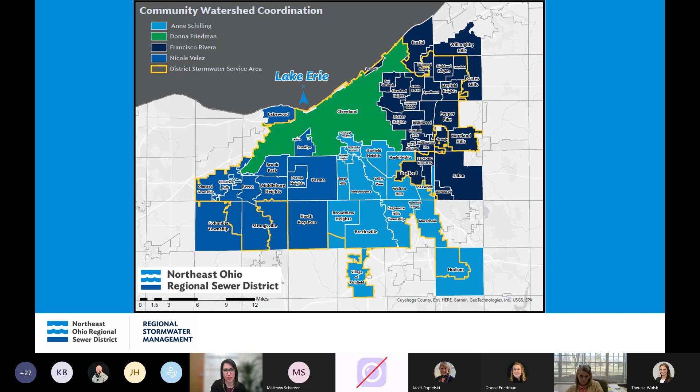So we're here to serve you. Our contact information is going to be at the end, but please feel free to reach out to us at any time for any questions you have. And with that, you're also welcome to pass our information on to your residents.

Okay, so here we've got the community cost share. Most of you know that 25% of the total annual stormwater management program fees collected from each member community are then allocated back to your community for local stormwater issues and projects. Currently there's over $21 million available to our member communities, so please think about projects you'd like to submit.

A couple things to remember: you need to have an approved application and an executed agreement with the sewer district before your project begins. So be sure to contact myself, or if you represent two communities, the appropriate watershed team leader for that community, and we will gladly walk you through this.

Also, consider an allocation agreement for larger projects. This will allow reimbursement back to your community over a 5-year time span, so your community doesn't have to have all that money up front. That can be quite helpful.

We want to encourage you to please use your community cost share funds, and then remember to submit for reimbursement. We want to get that money out of our bank and into yours, so please request your reimbursement so we can get that money back to you.

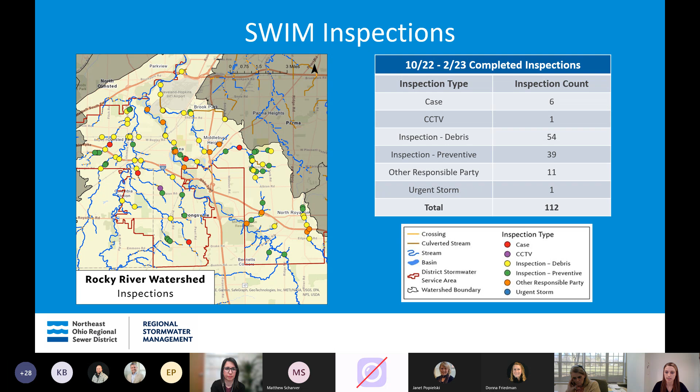Since our last WAC meeting, SWIM has completed 112 inspections in the Rocky River watershed. We've had 6 customer calls ranging from debris to flooding or erosion reports, and 1 CCTV video, which is when we have a contractor do a video inspection with equipment because usually the pipe is too small for us to fit in. We had 54 debris inspections, which include other responsible party inspections such as railroad, ODOT, or county crossings, and our quarterly debris rack inspections. We also had 39 preventative inspections, which are routine follow-ups based on structural condition scores, and 11 other responsible party inspections, which are when we receive an updated inspection report from that responsible party, allowing us to update the structural condition score for our record keeping.

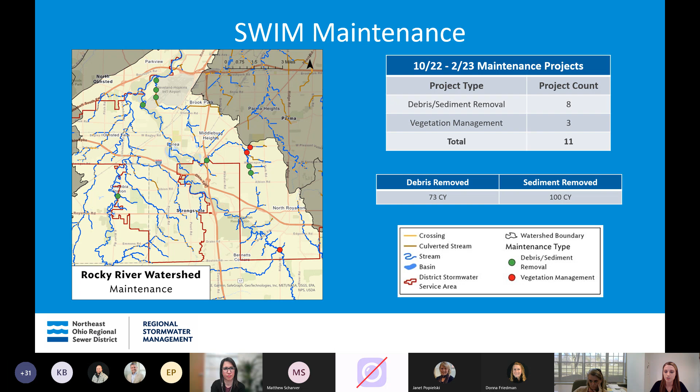For maintenance, we completed 11 projects that included 8 debris and sediment removals. For debris, we totaled 73 cubic yards, and for sediment, we had 100 cubic yards, all of which was from downstream of the airport in the Stilling Basin. We also had 3 vegetation management projects, which are our long-term routine maintenance for project sites, including tending tree cages, pruning, weed pulling, and mulching.

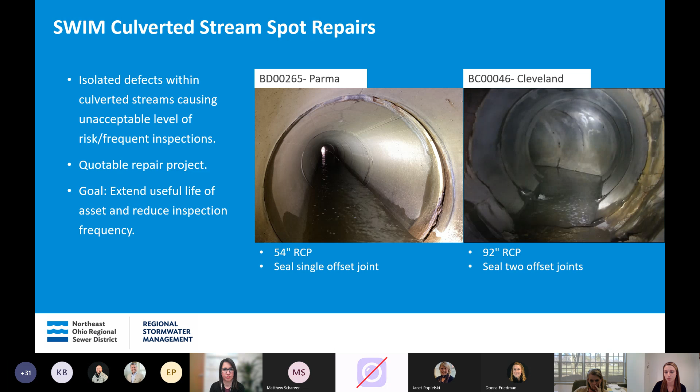For this year, SWIM is kicking off a new contract that is quotable for minor culvert repairs, such as patching or fixing joint issues. Typically, our design and construction team handles the larger projects for a full rehab or replacement, but this is intended to extend the useful life of the asset to reduce our inspection frequency. For example, we have BD 265 in Parma, which is in generally good condition other than one single offset joint with visible backfill. Repairing it will improve our rating, which will reduce our inspection frequency.

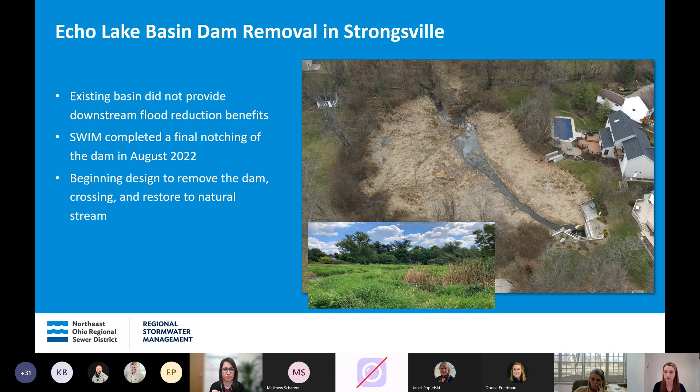Another project moving forward this year is our Echo Lake Basin dam removal in Strongsville. To recap from our last WAC meeting, the stormwater master planners found no flood reduction benefit in having this basin in place, so we wanted to redesign this as a natural stream. Last time, we talked about the gradual notching of the dam to lower the water level, which was completed in August of 2022. Beginning in the second quarter of this year, design will move forward, which usually takes about 1 year, and after design is complete, we can move into construction. That's what SWIM has since the last meeting and moving forward.

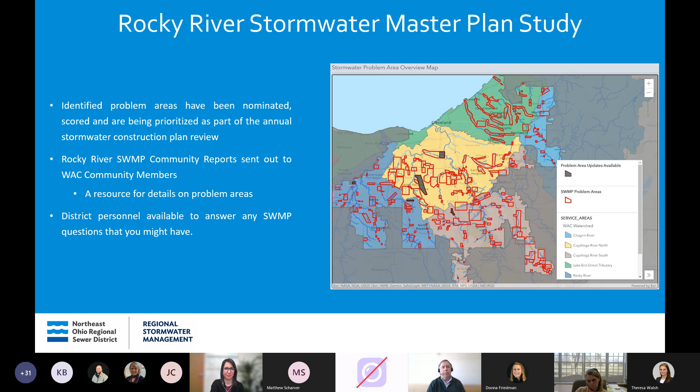So as I mentioned, we've just gone through the nomination process for 2022. What we did is we took all the previous nominations that were put into place from our various stormwater master plans and any additional projects identified through our swim group or from various communities. Back in August of 2022, we wrapped up all those project nominations. Since then, we've gone through validation in August and through October of last year, and finalized the scoring in the fourth quarter.

Right now, we're getting ready to finalize that stormwater construction plan and then proceed towards the end of this month to have that approved by our district board, and then we'll be implementing it for the remainder of this year.

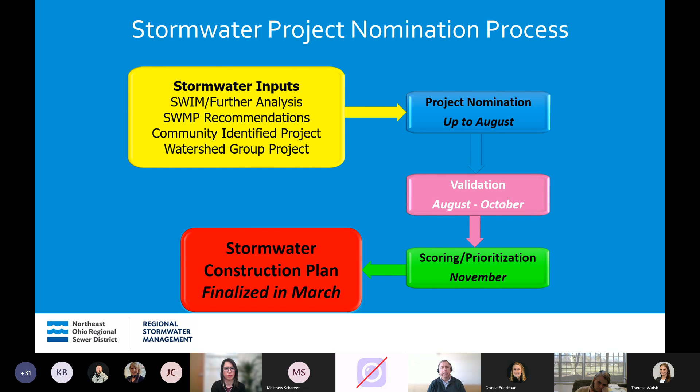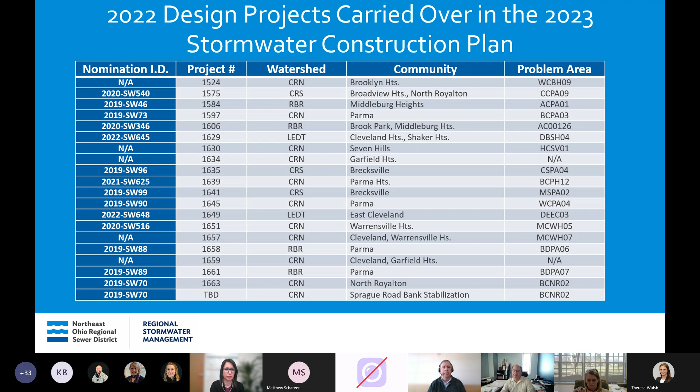In addition to those, we identified 4 projects that were previously nominated that are moving up into the 2023 stormwater construction plan, based upon a couple of different reasons. The first project is the West Branch problem area involving Kolleda Ditch. This is an area with a lot of failing infrastructure associated with this particular problem area, and as a result, we want to move that forward so we can address that. Phase A will specifically address the Kolleda Ditch within this problem area.

West Branch Problem Area 5 is located in the Rocky River subwatershed. With this project area, we've actually secured a critical amount of the property required to allow us to implement the first phase of that project, so we're going to be moving forward with that one.

The third project is the Applewood Basin Improvement Projects. This is in the Baldwin Creek subwatershed within the Rocky River. Again, we're dealing with failing infrastructure involving those basins, so what we want to do is get that into a design program so we can address those deficiencies in the basins to maintain the level of conveyance through this area of Baldwin Creek.

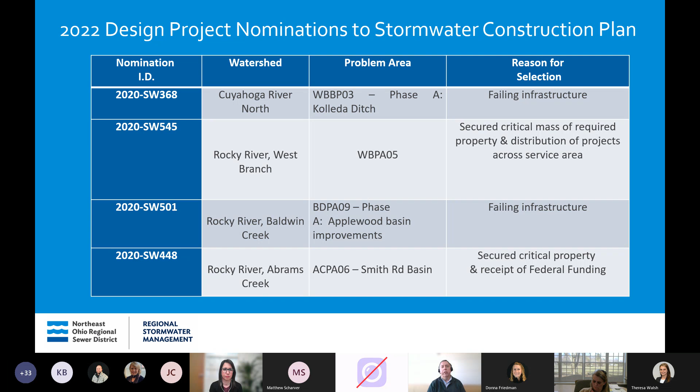And then finally, we have the Smith Road Basin Project, which is in the Abrams Creek subwatershed in the Rocky River. With this project, we were able to secure all the property involved with this problem area, and we were also able to acquire federal funding to allow us to move this project forward into design and construction. In addition to these projects, as we gain capacity, we'll be adding additional projects onto this listing as well.

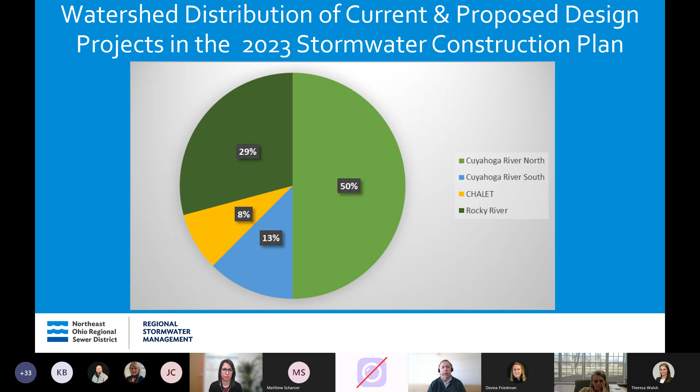So again, on this slide, what you're seeing is all the current and proposed design projects listed in our 2023 stormwater construction plan. This graph matches pretty closely with what you saw in the similar pie chart for the 2022 stormwater nominations.

As I mentioned, we have about 12 projects identified during our nomination process that need to go through advanced planning. These are projects that we want to get ready for full design, but ones where we may need additional information to understand the full impacts the project will have on the RSS. Some of these projects are very large, typically above $10 million in estimated planning costs to do the design and construction, and that cost doesn't work very well with our annual stormwater budgets.

What we're looking to do is review those projects and see if we can break them down into phases so they can be more manageably put through our annual construction budget to move them forward. Same thing is true if they're very complex projects—we want to break those down so we can move them forward, and collaborate with our partners to make sure we get any additional information associated with those advanced planning tasks.

Two of the projects we recently completed for advanced planning: the one on the left is Baldwin Creek Problem Area 6, located at the intersection of West Pleasant Valley Road and York Road in the city of Parma. This was a very complex, high-cost project that we successfully broke down into several tasks. We'll be starting the first task this year, involving the stormwater basin in the upper right-hand corner of the intersection.

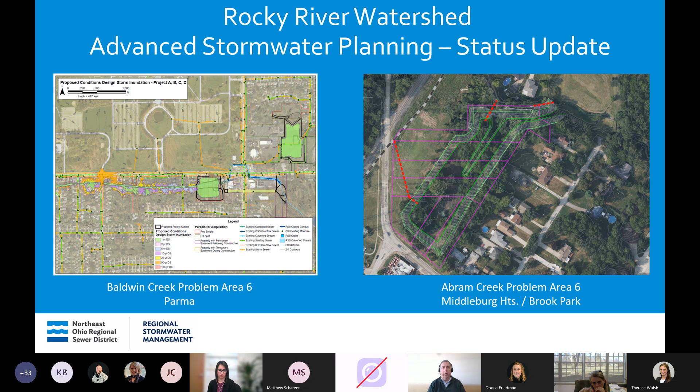Another project we recently completed was Abram Creek Problem Area 6. This involved installing a stormwater basin to address RSS flooding impacting the border between Middleburg Heights and Brook Park, specifically on Smith Road. With this advanced planning task, we confirmed the location of this basin on a piece of property recently made available to us, and did further modeling to ensure the installation would maintain the preferred alternative for this problem area.

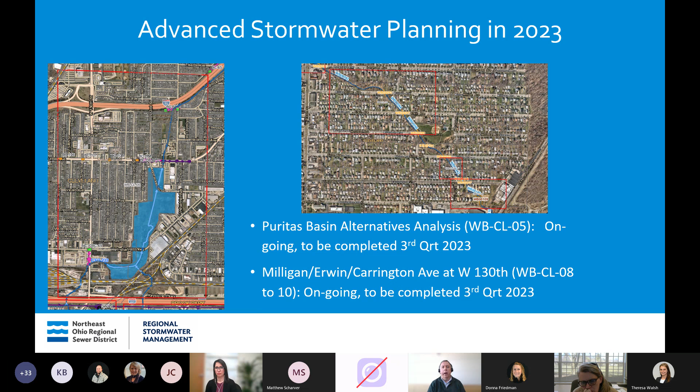Now we're getting ready to start another advanced planning task, again within the Big Creek West Branch sub-watershed. We're looking at this one because the preferred alternatives originally developed as part of the Rocky River Stormwater Master Plan are no longer viable. We want to get a better understanding of the interactions of a preferred alternative, both between the RSS and local stormwater systems, and see what the benefits would be to the new alternatives.

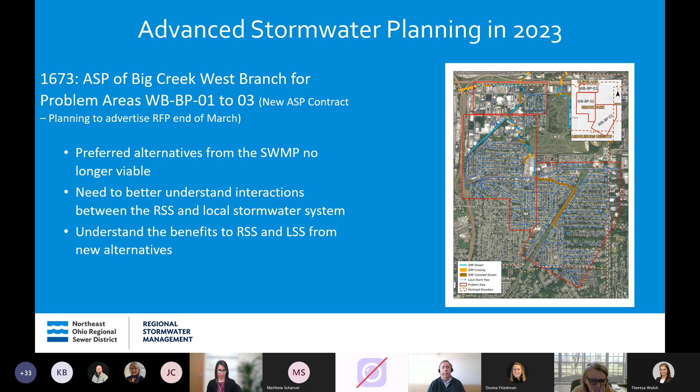In addition to these district-led projects currently underway, we have a number of community-led projects that we're providing financial and/or technical support to. Looking at the table, we have approximately 7 projects currently in the design phase and in various stages of design, getting ready to go to construction.

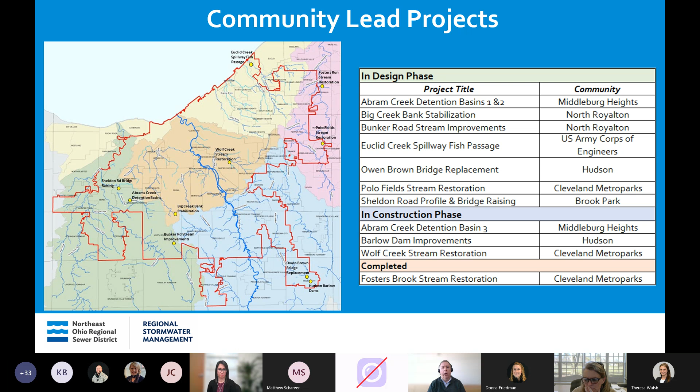We have 3 projects currently in the construction phase in the Abram Creek sub-watershed. And finally, we have 1 project, the Foster's Brook Stream Restoration, that we just completed in the 4th quarter of 2022. Next slide.

To give you an example of 2 of these community-led projects, the one on the left is in the Abrams Creek sub-watershed. This involves the design and construction of 3 detention basins to alleviate flooding along Big Creek Parkway. We're getting ready to start construction on basin number 3, which will be let in the 2nd quarter of this year with construction starting in the 3rd quarter. We're also continuing design of basin number 2, with plans to start construction probably in the 4th quarter of this year.

The image on the right shows the Sheldon Road project. We have a lot of inundation associated with Sheldon Road. This project, teaming up with the city of Brook Park, involves raising the profile of the road and replacing the bridge so we can lift it up high enough to get just about to the 100-year level of service on this roadway. Next slide.

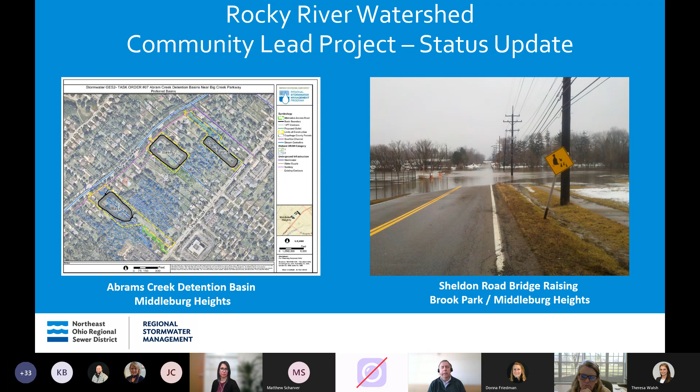We also have a number of projects being led by our watershed partner groups throughout our stormwater service area. Many of these are ones where watershed partners have applied for and received Ohio EPA Section 319 grant monies, and we're providing matching funds and potentially technical support. We have one project finishing its design work in the Rocky River, the Greenbrier Valley floodplain restoration, and four projects currently either starting or in substantial completion in the construction phase.

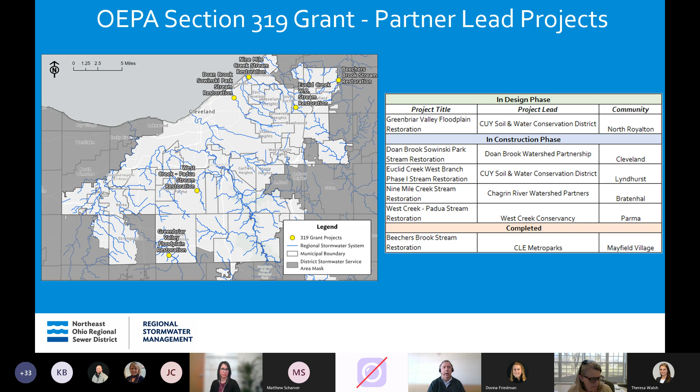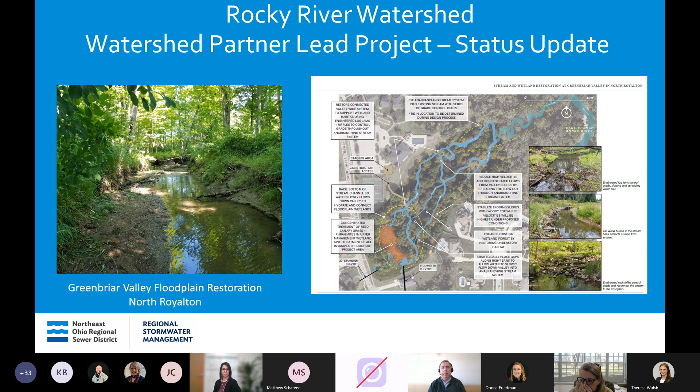To give an update on the Greenbrier Valley floodplain restoration, we're currently finishing up design on this project with our lead, the County Soil and Water Conservation District. They are at this time looking at getting all the permits needed for any impacts to wetlands and the stream channel itself. The plan right now is to both start and end construction in the fourth quarter of this year.

And with that, I'd be happy to take any questions that you might have.

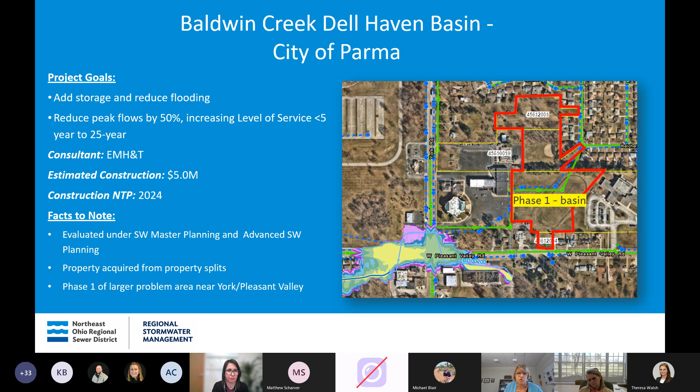One of the complications we'll be working around is that, as you can see on the screen, the area circled in red is the property where we're going to construct the basin, and there's a sanitary sewer and a storm sewer that run directly through there. Those will have to be relocated as we construct our basin.

The other project we're currently working on the design of is the Bonny Banks Basin expansion, also in the city of Parma. This residential area has experienced repetitive flooding over the years. This particular basin was originally built in the 1960s due to the development that was occurring. In 2018, we dredged this basin to provide temporary relief to this neighborhood. Through the Stormwater Master Plan, it was identified that the basin needed to be expanded, and a relief culvert was also identified for this neighborhood, which I'll talk about in just a moment.

In addition to expanding the basin and increasing the capacity by about 50%, we're also looking to improve our ability to maintain the basin. We're going to be installing access drives to clean off the outlet structure, as well as a forebay and access drives to the forebay itself.

One thing we take into consideration when designing our projects is maintaining them. Also in projects such as this, where we're dealing with a basin, we take special consideration for the sediment that's in the basin and how it's going to be dealt with.

We get this question a lot from the public: what do we do with all the sediment we're removing. During the design stage, we test the sediment for both characterization and potential contamination. We use that information to develop estimates for disposal. If contaminants exceed a residential level, we adjust our estimates to make sure it's properly disposed of. If not, we take that into consideration as well.

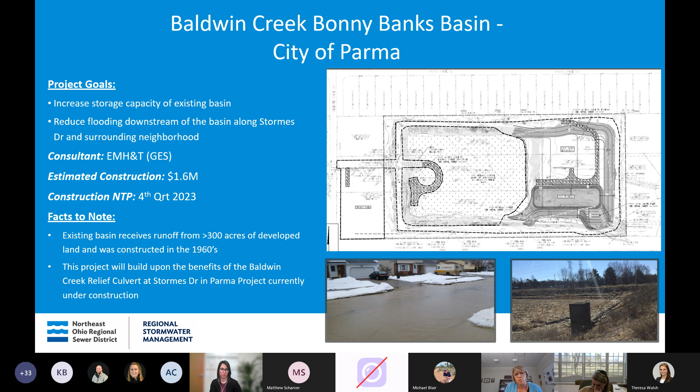We provide that information to the contractors during bids, and it's up to them how they ultimately handle the sediment. But during construction, we require them to submit their disposal locations for our review, so we can make sure they have all the proper permits and permission to take that sediment there. We do this for review purposes only, we don't approve it, but it's how we make sure any sediment that goes off site is properly handled.

Next slide. There's one project currently under construction in the Rocky River Watershed I'd like to highlight, which I briefly mentioned when talking about the Bonny Banks Basin: the Stormes Drive Relief Culvert on Baldwin Creek. This is in the same neighborhood directly downstream of that basin. Through the master plan, they recognized this culvert was necessary because there was just a 36-inch culverted stream section going through the area that wasn't properly draining, so the recommendation was to install a 48-inch relief culvert.

In this picture you can see two culverts - the second 48-inch was another storm sewer in the area. We've also been working around a lot of utilities on this project: a 20-inch high-pressure gas main, a water line, and a sanitary sewer that had to be relocated or worked around. The nice thing about this was that it's all been in the public right-of-way. A lot of times we're having to acquire easements for our projects, but this one we were able to do within the public right-of-way.

This was awarded last year to Fabrizi Trucking, and it's currently underway for $1.6 million. We're anticipating substantial completion in November of this year.

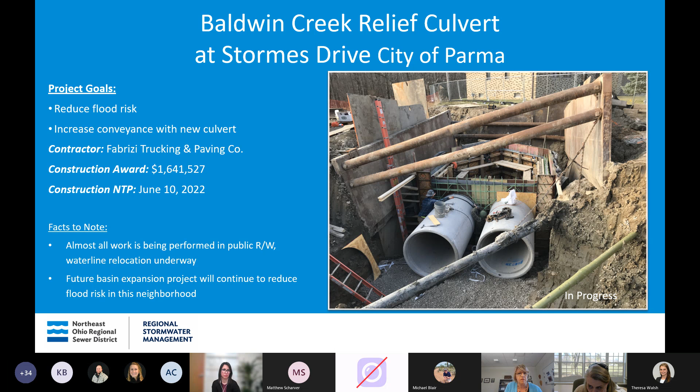Next slide. Just to highlight a few of our recently completed projects in the Rocky River Watershed, we've actually had quite a few going on over the past several years.

This one is Blodgett Creek stabilization in the city of Strongsville. This was a small bank stabilization project originally identified by our stormwater inspection and maintenance group, involving 350 feet of stream stabilization. There's also a sanitary sewer through the area, which we worked with the city of Strongsville to enter into an agreement so we would replace and protect it during construction. That's something we're always looking to do on our projects - if there's mutual benefit to enter into an agreement with a community or partner to address another issue, we're always willing to do that.

This project was recently completed by Northstar Contracting for $389,000. Next slide.

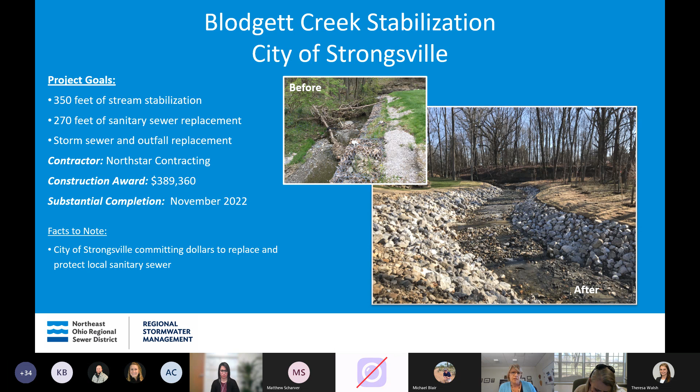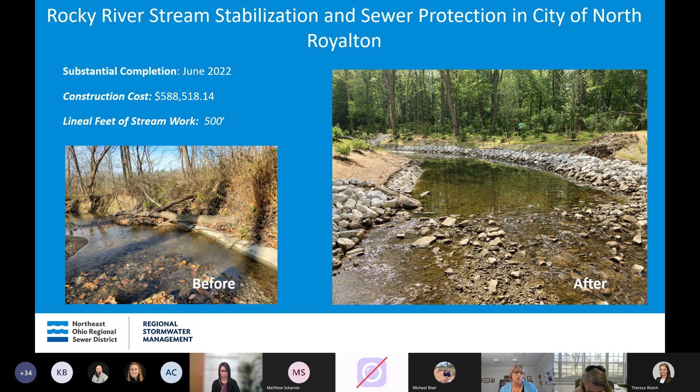The Rocky River Stream Stabilization and Sewer Protection in the city of North Royalton was another one we partnered with the community on. In this instance, the stream was eroding right into a sanitary sewer, so we did the stabilization of about 500 lineal feet and also included the encasement of the sewer. We partnered with the city to make sure the stream was addressed and the sewer was in good condition, so we didn't have to get back into that stream at a later date. This one was completed in June of last year.

This project was completed about a year ago now. The vegetation is really taking hold nicely, and the stream is stabilizing very well.

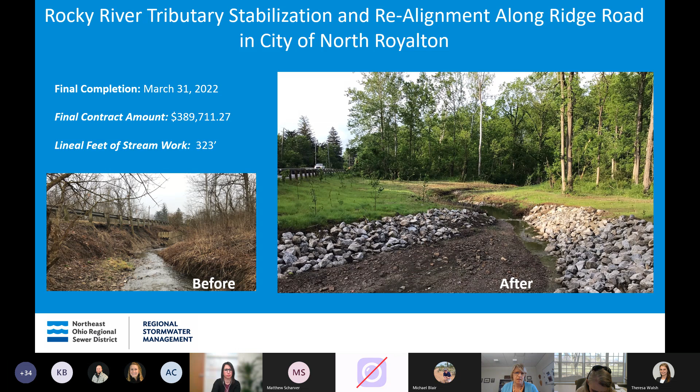So we're going to try to provide you with more of these types of things in the future to show you how the projects function after we're completed. So with that, I'd be happy to take any questions. And if there are none, then I'm going to turn it over to Rob Stoerkel to talk about our SagesGov and our plan review. Thank you.

Hello, I am Rob Stoerkel. I'm the Community Discharge Permit Program Specialist here at the Sewer District, and my job is to monitor the plan review, and we use a software called SagesGov for that.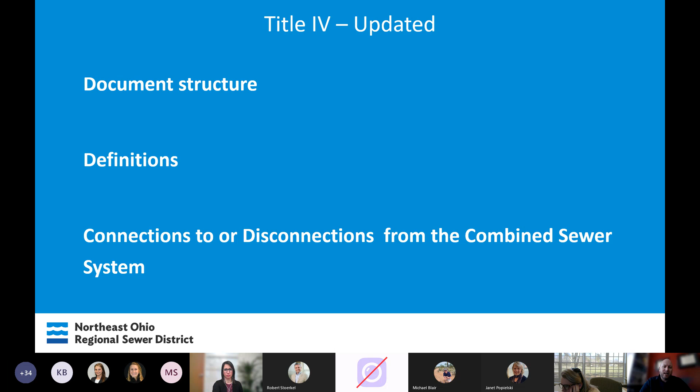This information was already in Title IV, just buried in other chapters. We thought it was very important, especially because of the work the sewer district is doing and the investment in Project Clean Lake to address combined sewer overflows. We want to ensure any developments, connections or disconnections from combined sewers go through that Title IV review process that Rob was talking about. So there's a new chapter that better identifies exactly what that process is and how the community can ensure they're following it correctly.

The benefits of these updates to Title III and Title IV are really consistency—making sure these two codes of regulations align with one another and making them easier for everybody to use. What we're doing is creating one unified permit. In the past there was a Title III permit and a Title IV permit, and for communities with separate sewers and combined sewers, it got a little cumbersome having two separate permits. So we're combining those into one unified permit that identifies what's required for both Title III and Title IV.

We want to improve the utilization of district resources. The sewer district invested quite a lot of money in local sewer system evaluation studies across our service area to identify issues and high-level solutions within the local sewer system. We want to ensure those are being utilized and that there's money out there to help correct and fund these problems—designed to work hand in hand. We've identified the problems, come up with high-level solutions, and now we'll provide an opportunity for funding those solutions through the Member Community Infrastructure Program, the MCIP grant.

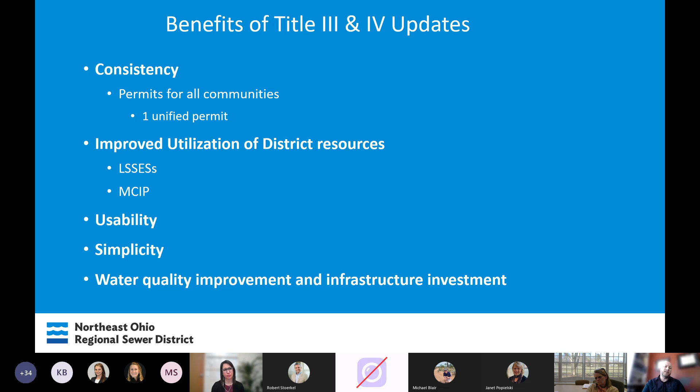So overall usability is going to improve, simplicity hopefully will improve with the unified permit, and water quality improvement and infrastructure investment across our service area hopefully will improve as well. We're going to help guide you through this process from beginning to end—helping you identify issues, come up with funding, and walking you through the whole process.

That's all I have for you today on the updates of Title III and Title IV. We'll be rolling this out throughout 2023. 2024 will really kick off the new permits and implementation of Title III and Title IV. So you'll be hearing more from me later this year, and I look forward to working with each and every one of you. Thank you.

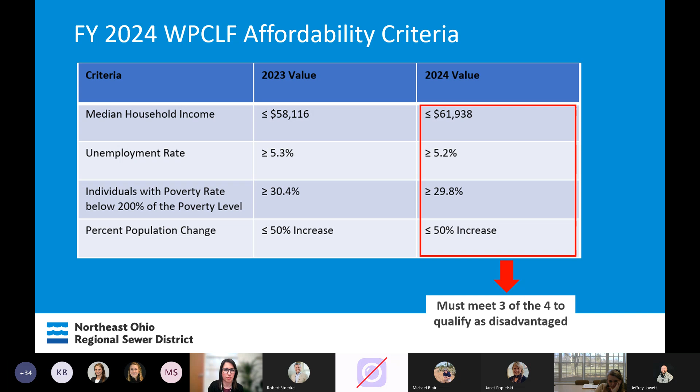This is showing you the criteria for the disadvantaged communities. The communities had to meet 3 of the 4 categories listed here. Last year, 20 of our member communities qualified as disadvantaged, and you can see that the numbers have slightly changed for 2024. So we're going to be looking at those new numbers and confirming that those same 20 communities are also eligible this year, and maybe there are a few more.

These are some of the projects that score really well for the Water Pollution Control Loan Fund. As you can see, it's similar to the Member Community Infrastructure Program in that the projects that benefit the human health category are considered a priority.

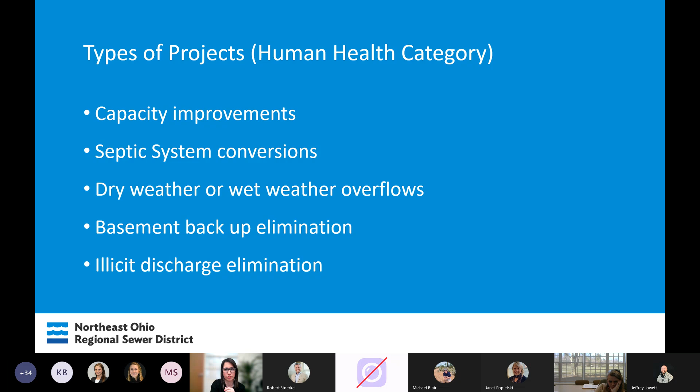In 2022, we reviewed the communities that qualified for funding against the LSSES study projects. We analyzed what those projects we thought that we could design, as well as the tier of the project, to help prioritize them. We helped communities apply for 8 projects, and 3 ended up receiving principal forgiveness, which we're really happy about.

This year, we've again been looking at how we can position communities to apply for this program this August. If your community is eligible for principal forgiveness, you will likely hear from us in the near future. We want to continue to work together to bring more money into this region. So let's move on to that.

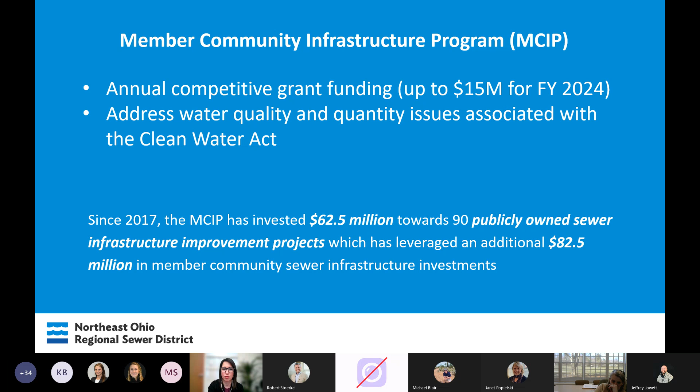Onto our Member Community Infrastructure Program grant funding. This is a competitive grant, offered annually, and for 2024 we have $15 million available to be awarded. The grant program was created to address Clean Water Act issues since 2017, and since then, $62.5 million has been awarded, with an additional $82.5 million in matching investment from our member communities and other funding sources. So it's a lot of dough.

In this slide, you can see the program impact so far. A lot of great work has been done over the last 7 years, and we really look forward to your 2024 funding year submissions.

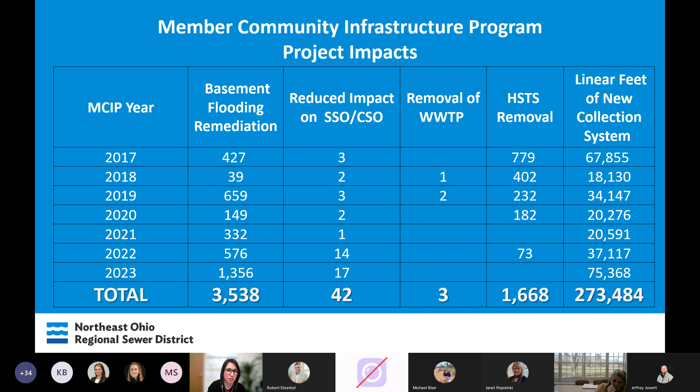There have been a few changes to the MCIP policy. The most important change is how we will be distributing those funds. Previously, it's been reimbursement-based, and that's been successful, but we want to be able to have more communities apply for this program. So during reimbursement, communities would pay the consultant or the contractor, and then we would reimburse the communities with that money.

Beginning July 1st of this year, we're going to be changing over to direct disbursement. That means the community will review the contractor's invoices and ensure that the work has been properly executed, then submit those invoices to the sewer district for further review. Got a lot of money going on here. Then we will simply disburse the money back to the community. This way, it allows the community an easier way to let the funds flow through and not have to worry about having all that money up front.

So again, the direct disbursement begins July 1st. The current reimbursement procedures will remain in place until June 30. If you have any questions, I should have put her contact information on here—Linda Mayer will be sending a detailed email in the near future, I think before June, to make sure everybody's on the same page with this new policy change. If you have an MCIP project agreement that was already executed before this was enacted, you can request to switch it to direct disbursement after July 1st.

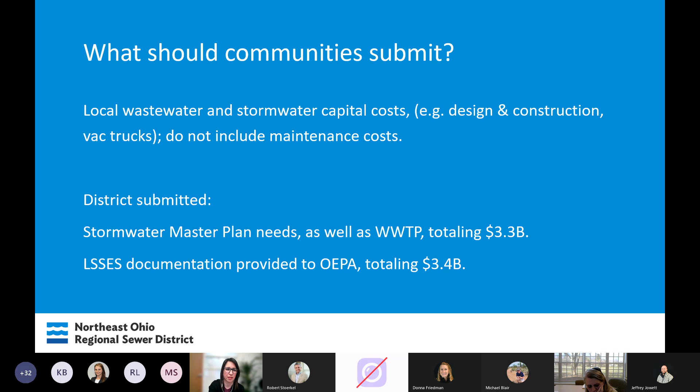Don't be shy. I don't see any questions, Nikki, but I did want to point out that occasionally in the past we've done a workshop for MCIP. We've kind of revamped that - Keith McClintock and his group have revamped it, and now there's a story map that is really nice. I'll put the link in the chat, but you can scroll through and it has everything from what's new in 2024 to project eligibility, project evaluation, and online application information. So please just scroll through - it's a great resource and we look forward to your applications.

And with that, any other questions? I would like to add that we have been hosting these meetings virtually for the past several years, and we are anticipating and hoping to have this in person this October. As soon as we have those dates set, we'll send them to you, but hopefully we can see everybody in person.